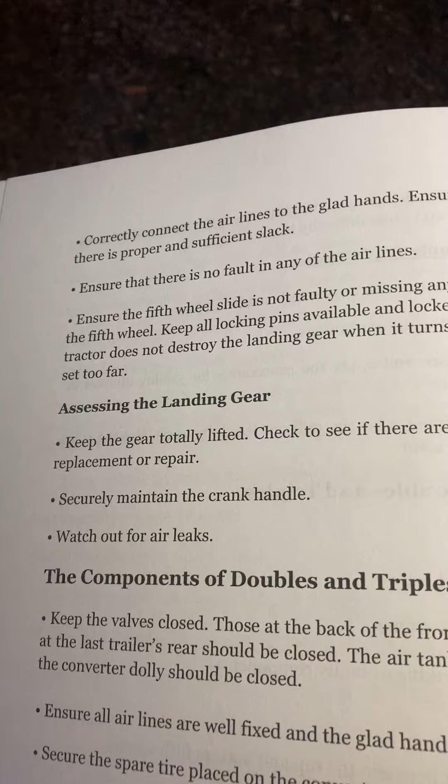CDL exam prep 2022 through 2023, page 46.

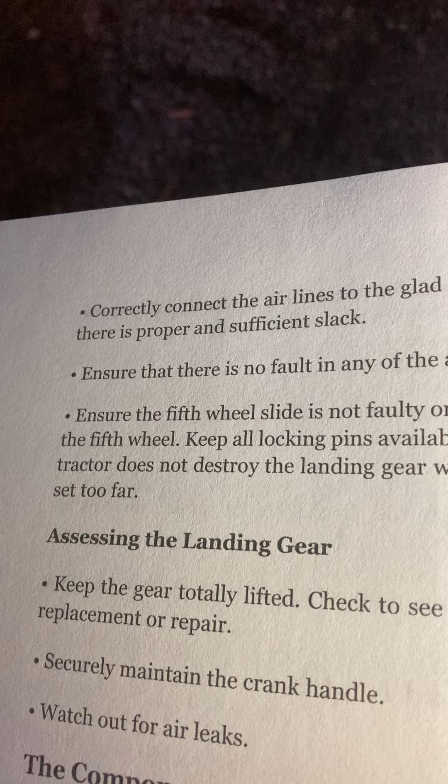Correctly connect the airlines to the glad hands. Ensure there are no air leaks and that there is proper and sufficient slack. Ensure that there is no fault in any of the airlines.

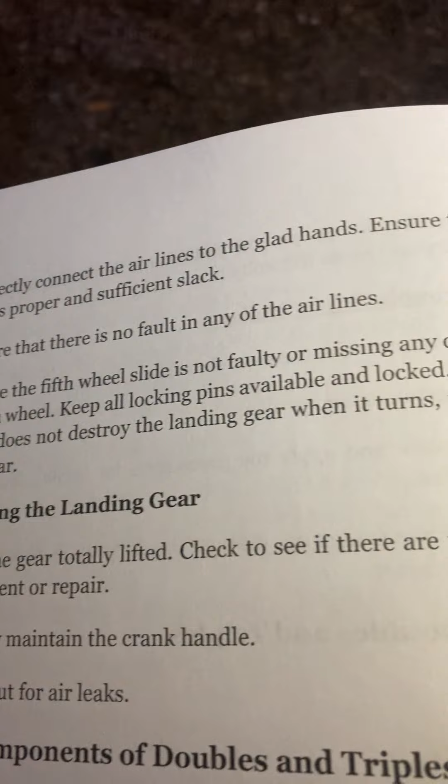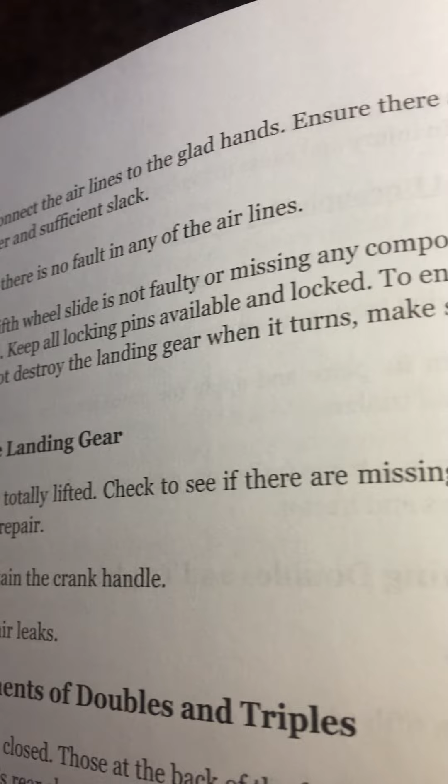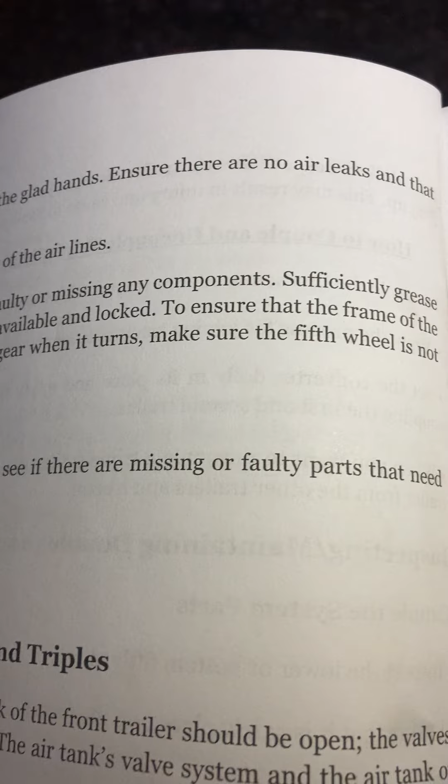Ensure the fifth wheel slide is not faulty or missing any components. Sufficiently grease the fifth wheel. Keep all locking pins available and locked, to ensure that the frame of the tractor does not destroy the landing gear when it turns. Make sure the fifth wheel is not set too far.

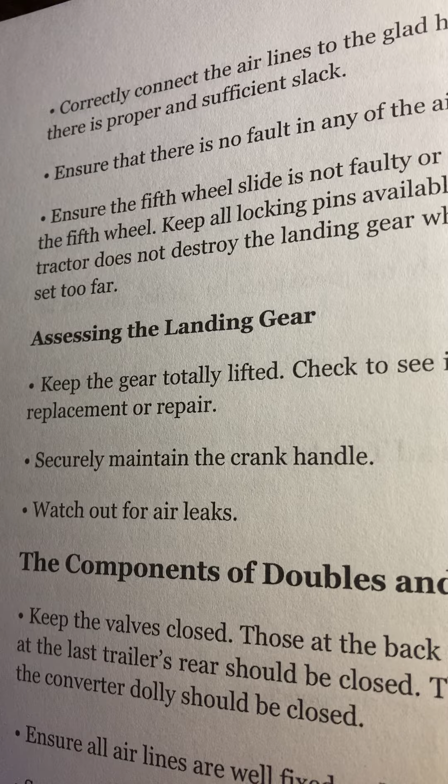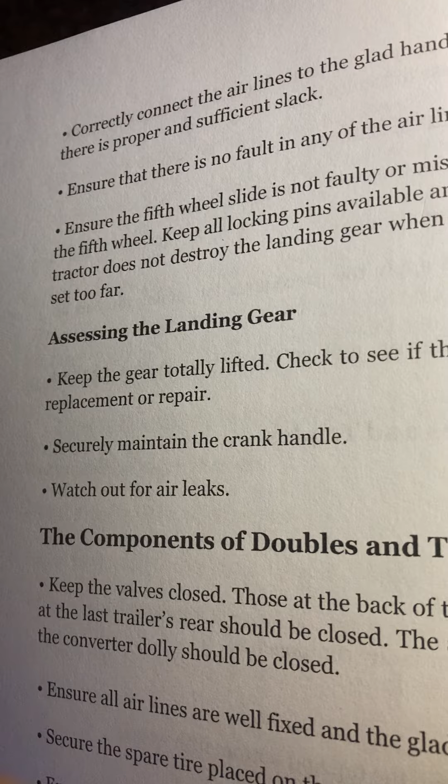Assessing the landing gear, keep the gear totally lifted. Check to see if there are missing or faulty parts that need replacement or repair. Securely maintain the crank handle. Watch out for air leaks.

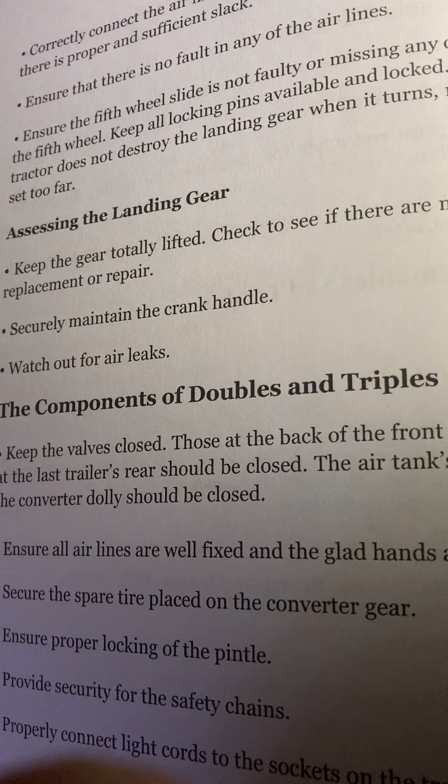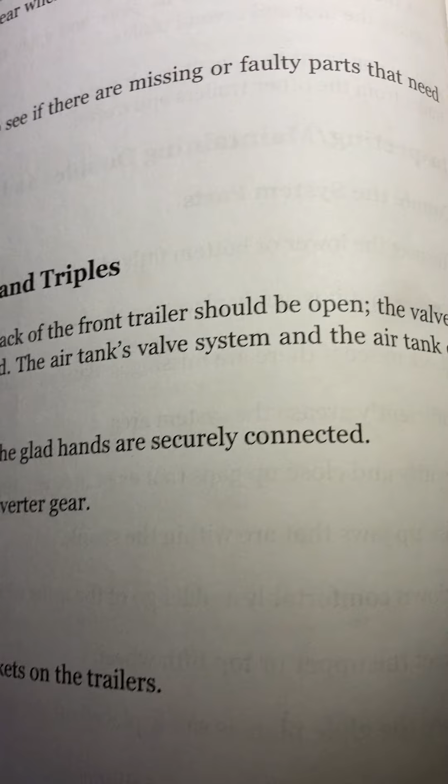The components of doubles and triples. Keep the valves closed. Those at the back of the front trailer should be open. The valves at the last trailer's rear should be closed. The air tank's valve system and the air tank of the converter dolly should be closed.

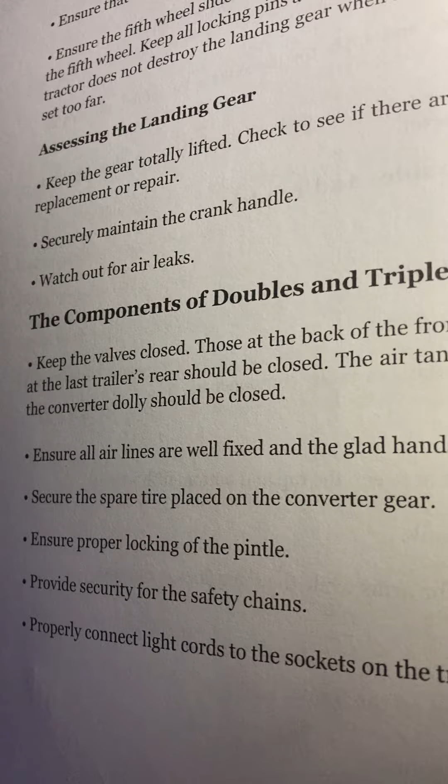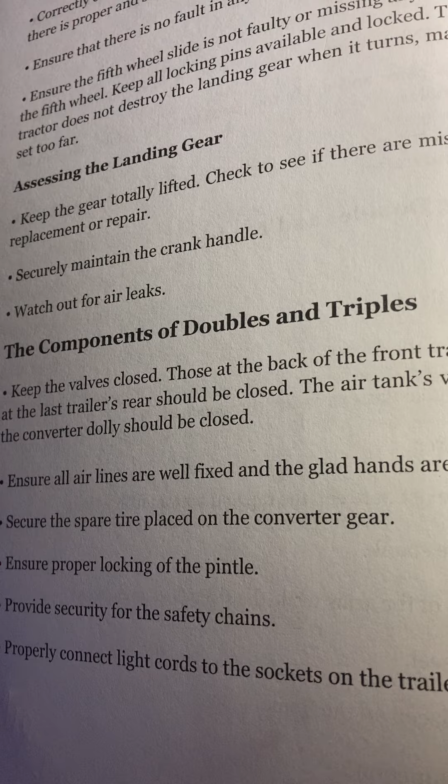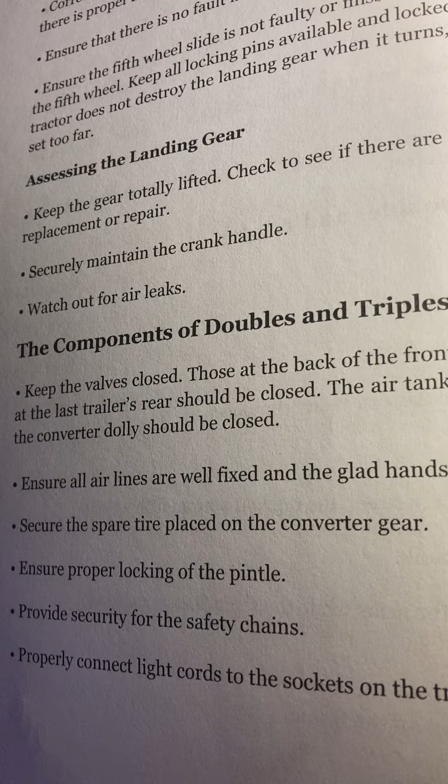Ensure all air lines are well fixed and the glad hands are securely connected. Secure the spare tire placed on the converter gear. Ensure proper locking of the pintle. Provide security for the safety chains. Properly connect light cords to the sockets on the trailers.

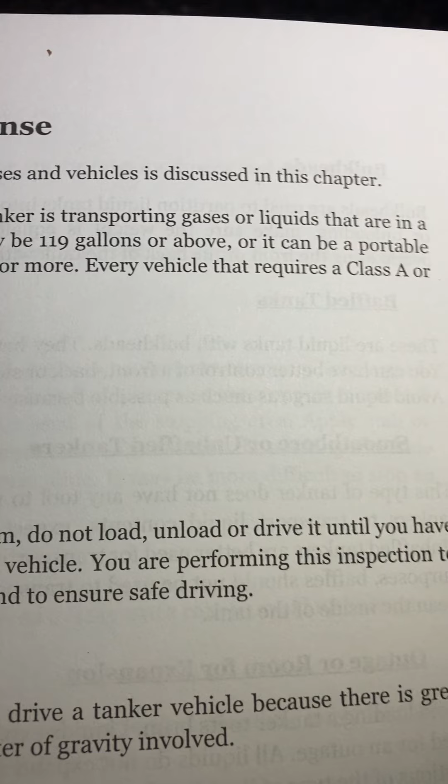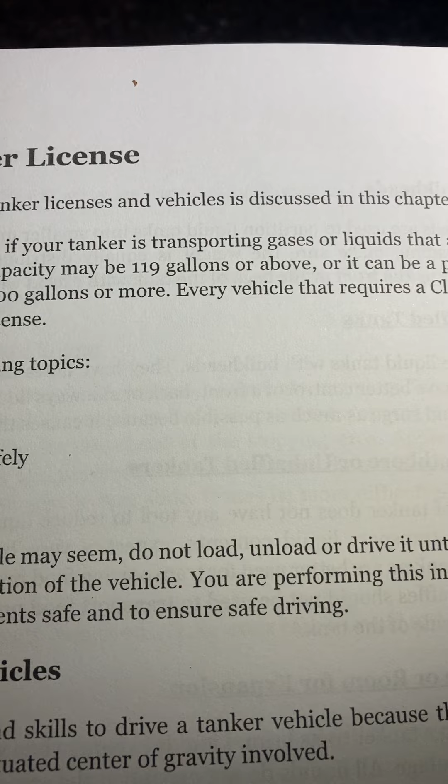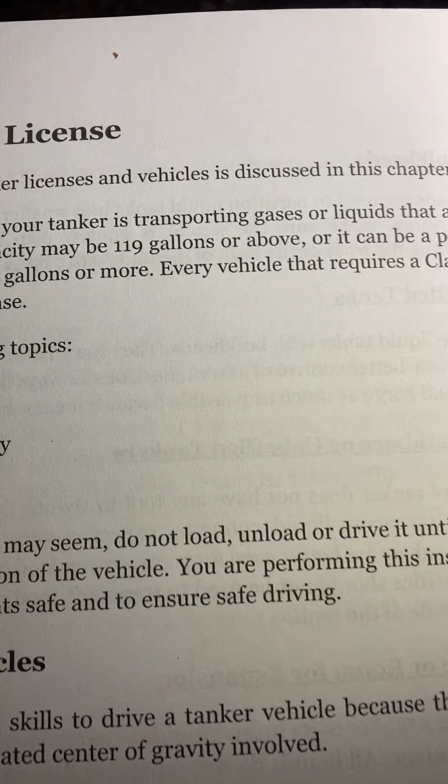Tanker license. All you need to know about tanker licenses and vehicles is discussed in this chapter. You will need a tanker license if your tanker is transporting gases or liquids that are in fixed cargo. The cargo tank capacity may be 119 gallons or above, or it can be a portable tank that has a capacity of 1,000 gallons or more. Every vehicle that requires a Class A or Class B CDL needs a tanker license.

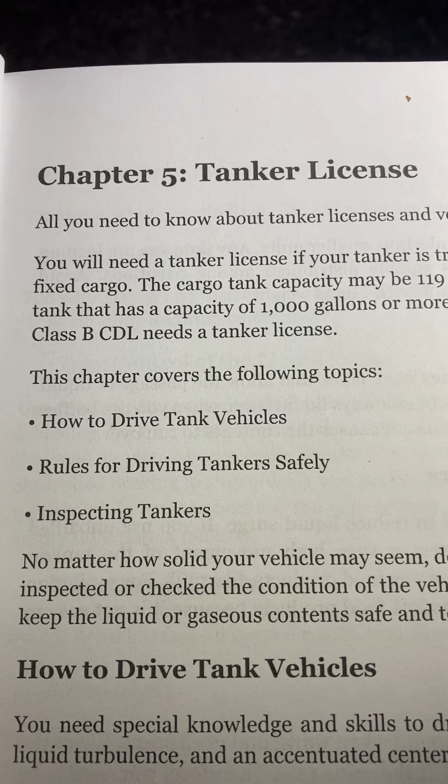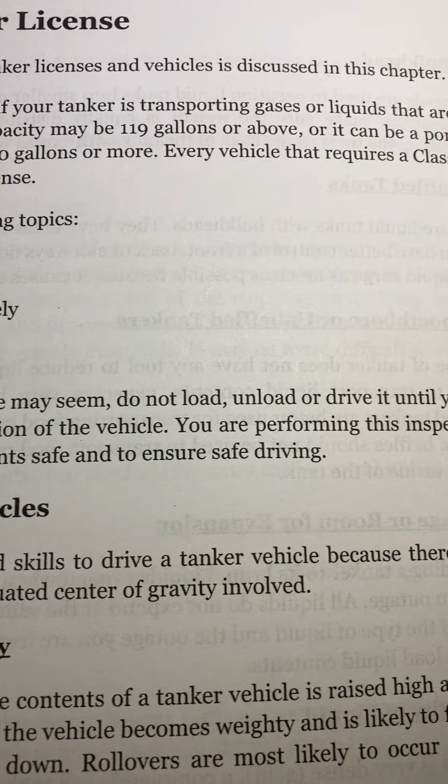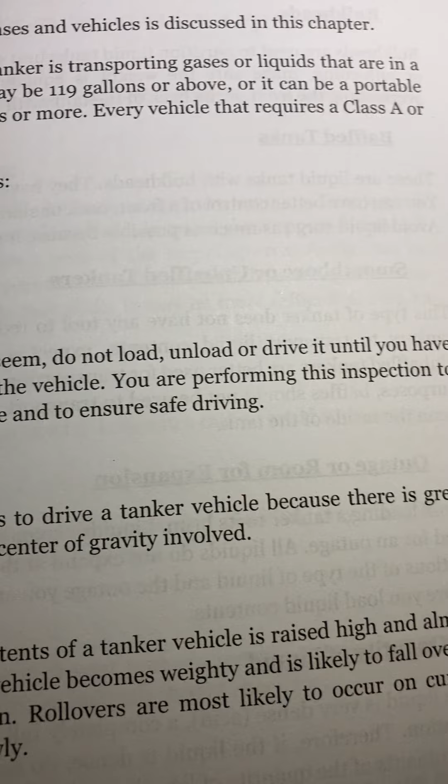This chapter covers the following topics: how to drive tank vehicles, rules for driving tankers safely, and inspecting tankers. No matter how solid your vehicle may seem, do not load, unload, or drive it until you have inspected or checked the condition of the vehicle. You are performing this inspection to keep the liquid or gaseous contents safe and to ensure safe driving.

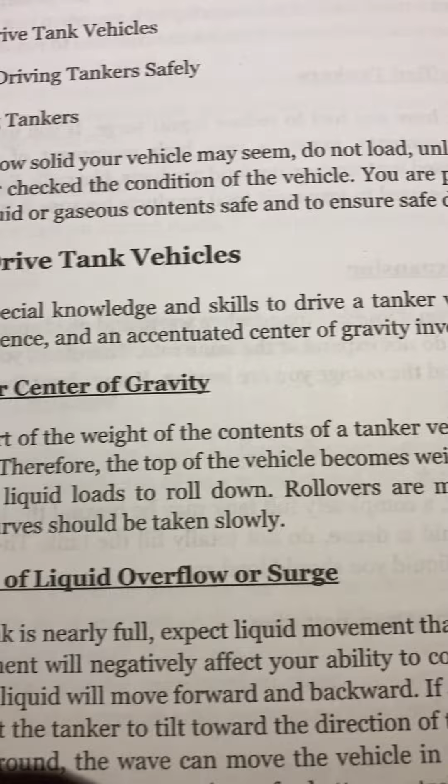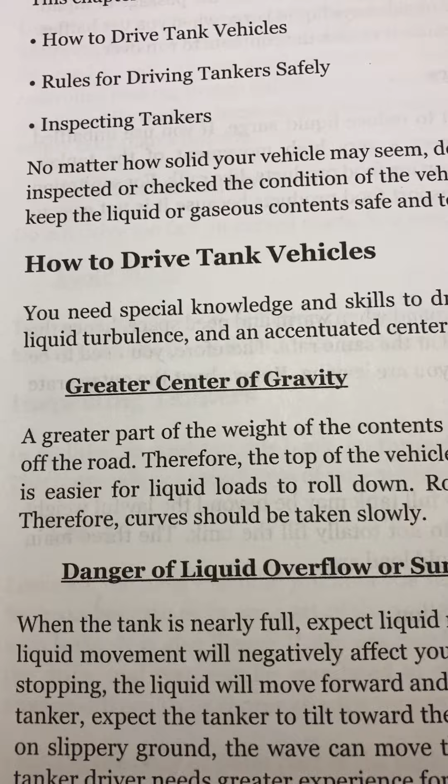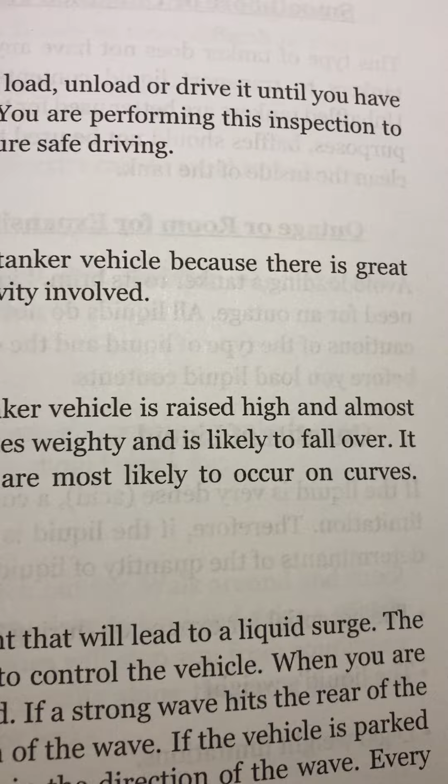How to drive tank vehicles. You need special knowledge and skills to drive a tanker vehicle because there is great liquid turbulence and an accentuated center of gravity involved. A greater part of the weight of the contents of a tanker vehicle is raised high and almost off the road. Therefore, the top of the vehicle becomes weighty and is likely to fall over.

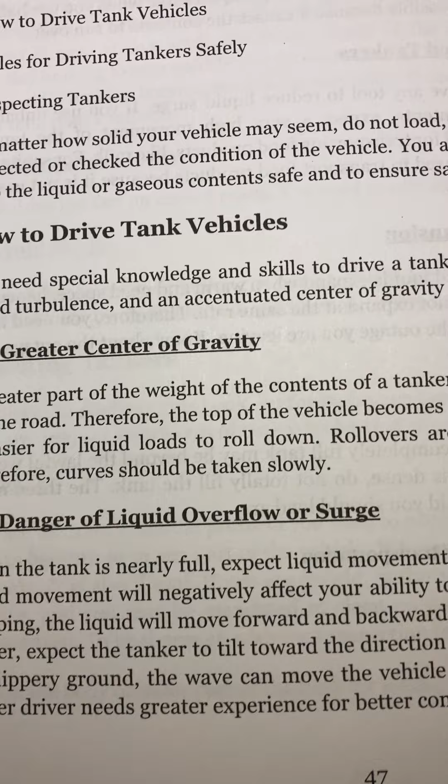It is easier for liquid loads to roll down. Rollovers are most likely to occur on curves. Therefore, curves should be taken slowly.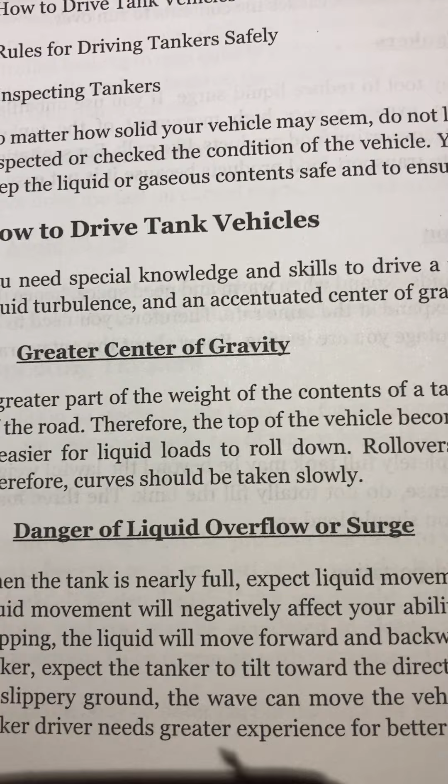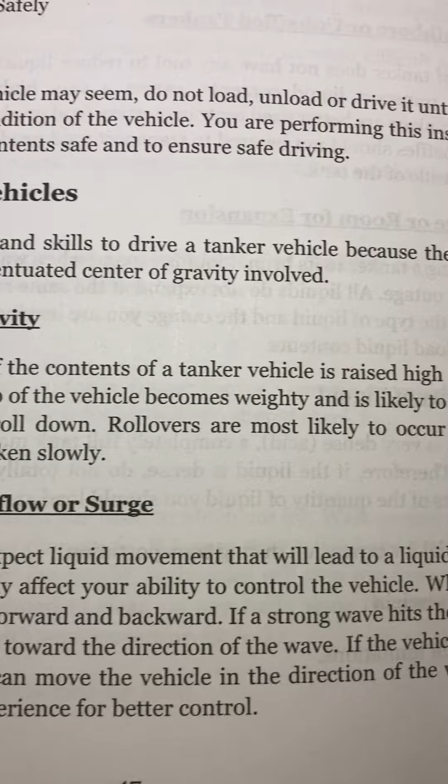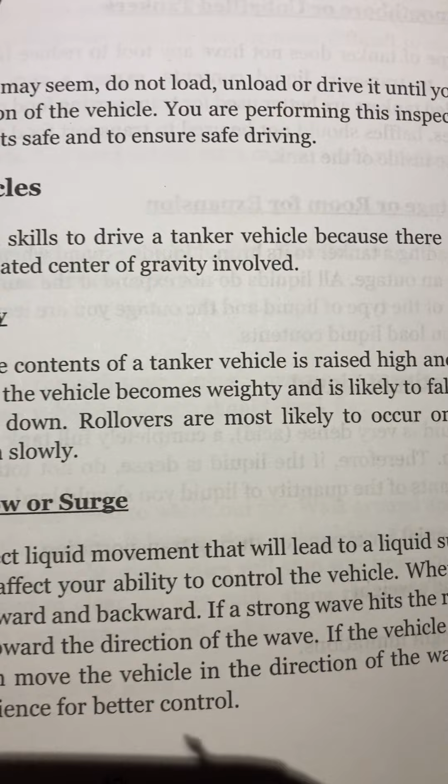Danger of liquid overflow or surge. When the tank is nearly full, expect liquid movement that will lead to a liquid surge. The liquid movement will negatively affect your ability to control the vehicle. When you are stopping, the liquid will move forward and backward. If a strong wave hits the rear of the tanker, expect the tanker to tilt toward the direction of the wave. If the vehicle is parked on slippery ground, the wave can move the vehicle in the direction of the wave. Every tanker driver needs greater experience for better control.

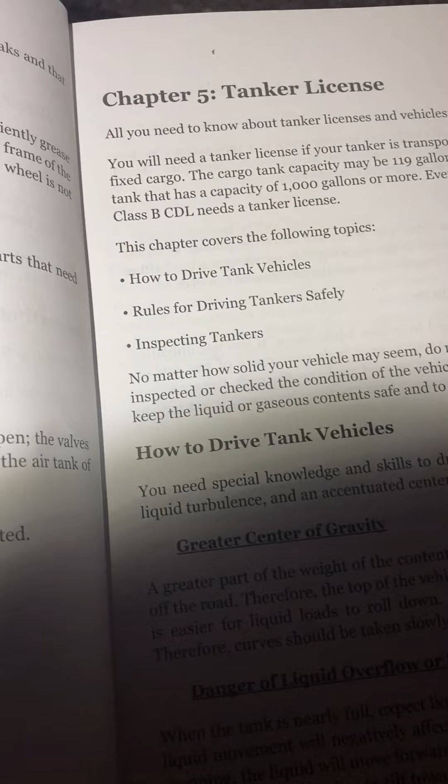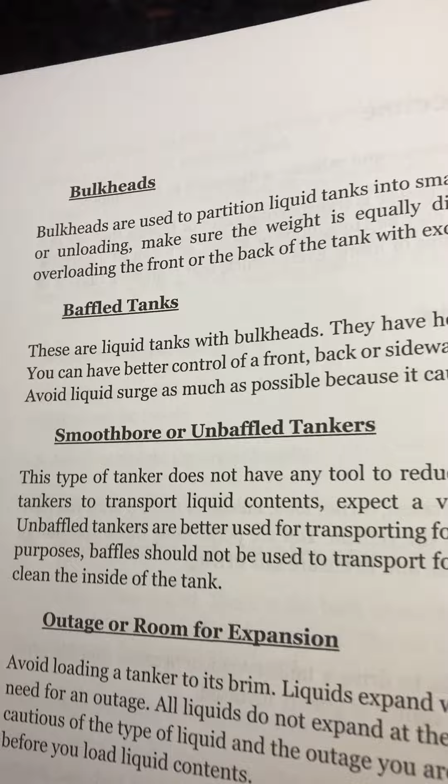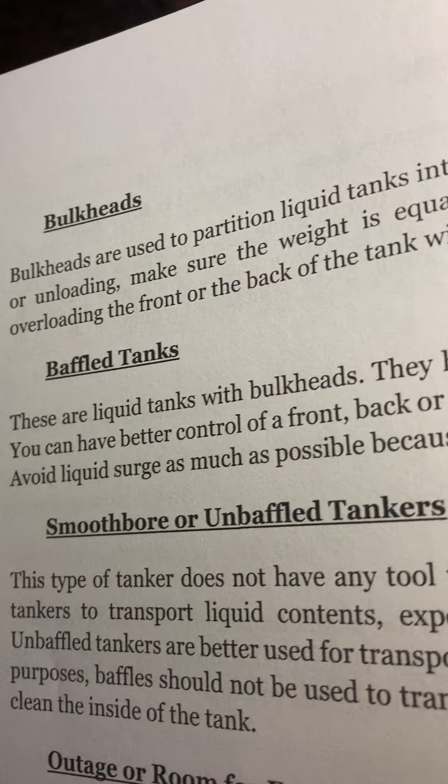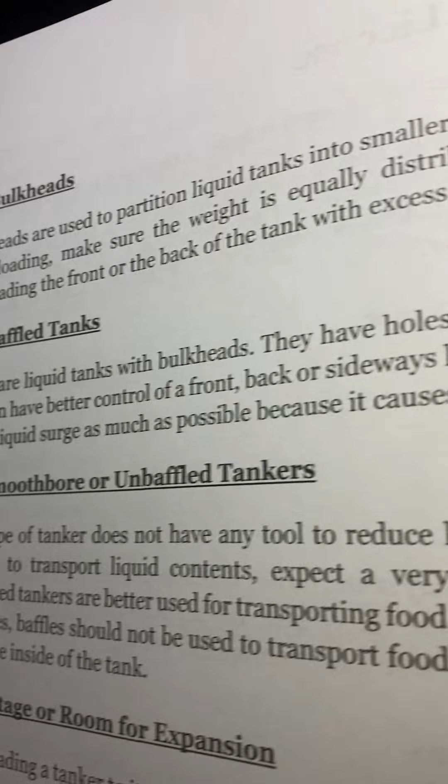Page 48. Bulkheads are used to partition liquid tanks into smaller units. Anytime you are loading or unloading, make sure the weight is equally distributed among partitions. Avoid overloading the front or the back of the tank with excess weight.

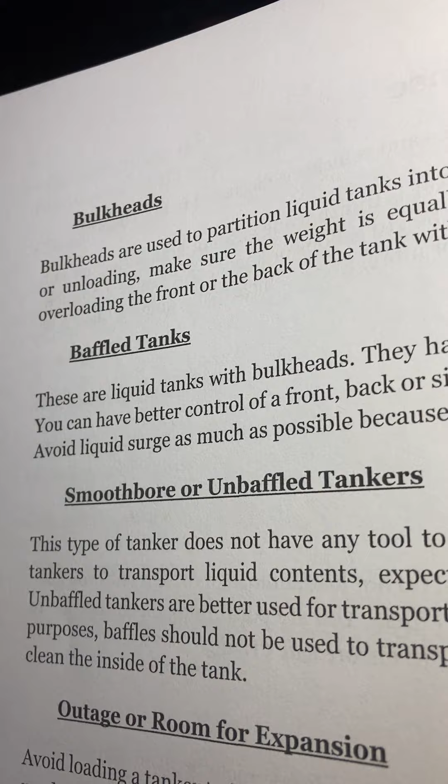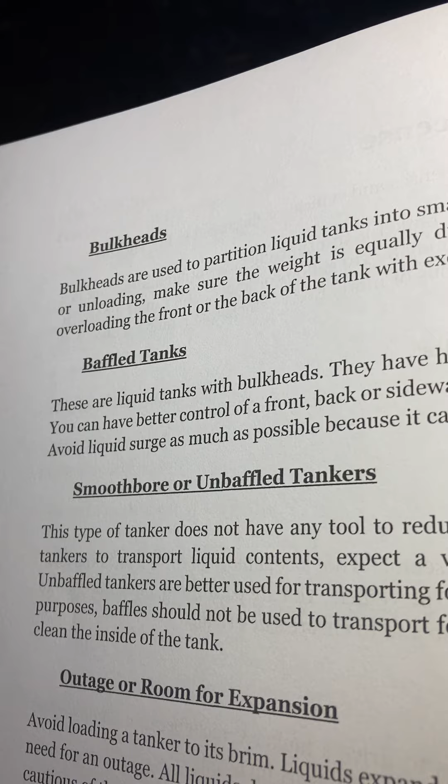Baffled tanks. These are liquid tanks with bulkheads. They have holes that allow the passage of liquid. You can have better control of a front, back, or sideways liquid surge when you use baffles. Avoid liquid surge as much as possible because it causes the contents to run over.

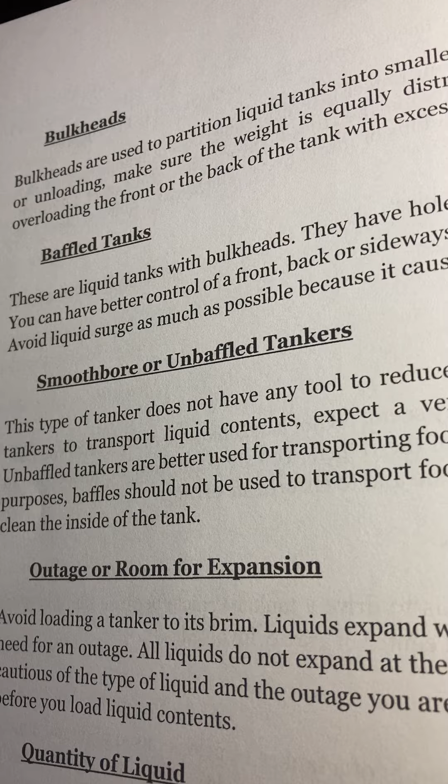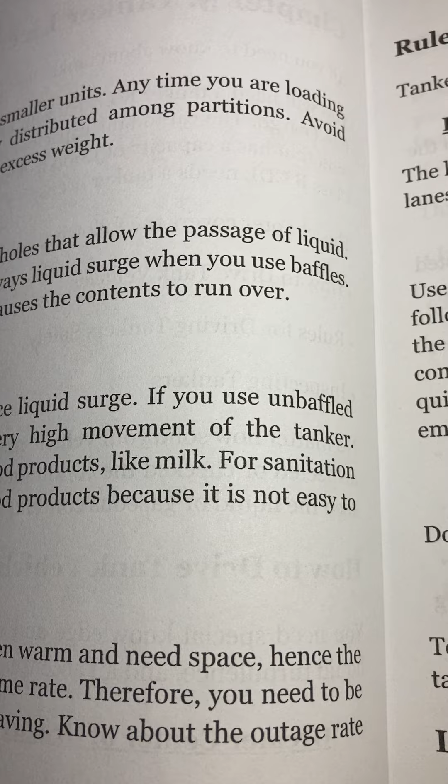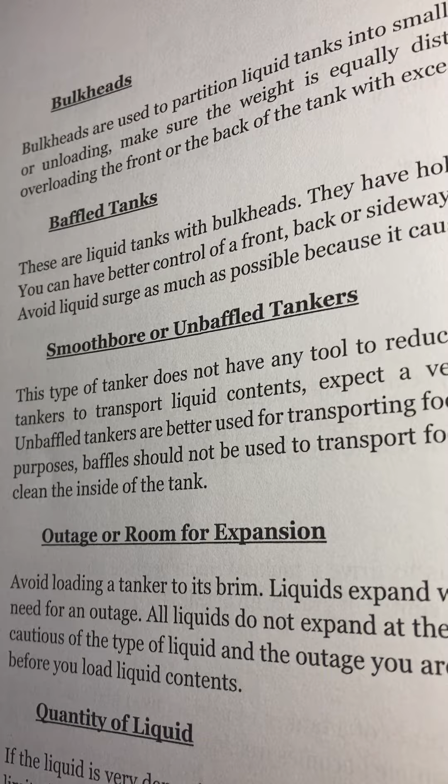Smoothbore or unbaffled tankers. This type of tanker does not have any tool to reduce liquid surge. If you use unbaffled tankers to transport liquid contents, expect a very high movement of the tanker. Unbaffled tankers are better used for transporting food products like milk for sanitation purposes. Baffled tanks should not be used to transport food products because it is not easy to clean the inside of the tank.

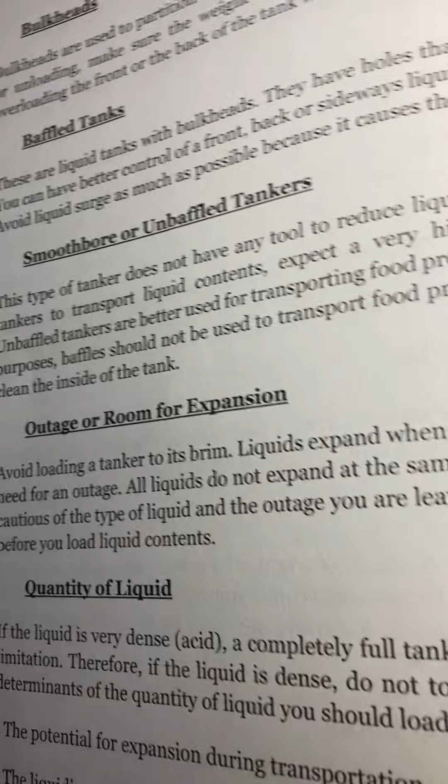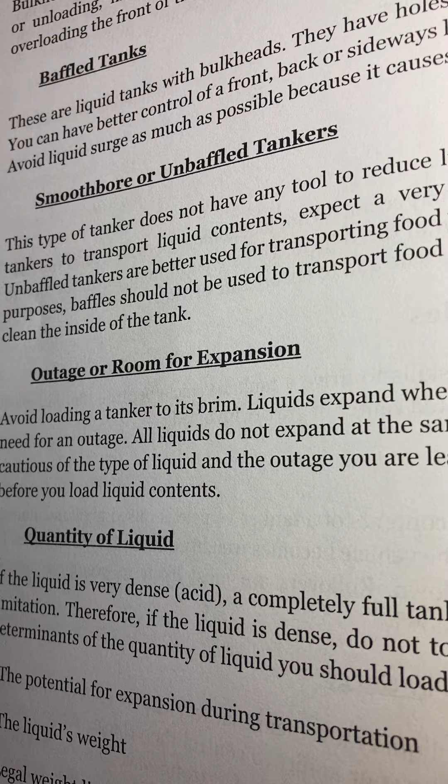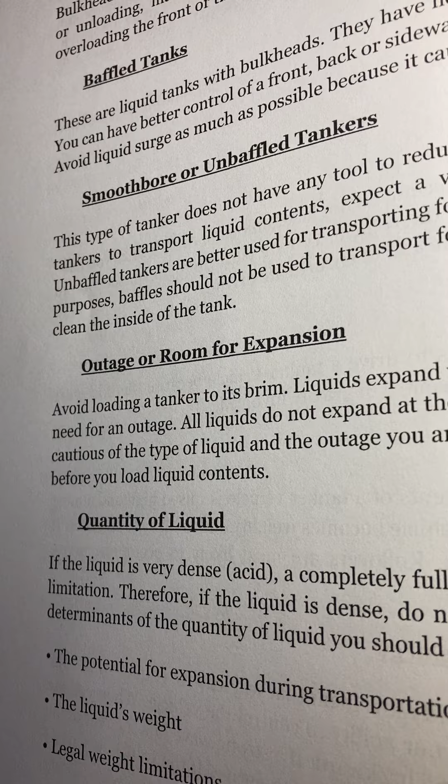Outage, or room for expansion. Avoid loading a tanker to its brim. Liquids expand when warm and need space, hence the need for an outage. All liquids do not expand at the same rate. Therefore, you need to be cautious of the type of liquid and the outage you are leaving. Know about the outage rate before you load liquid contents.

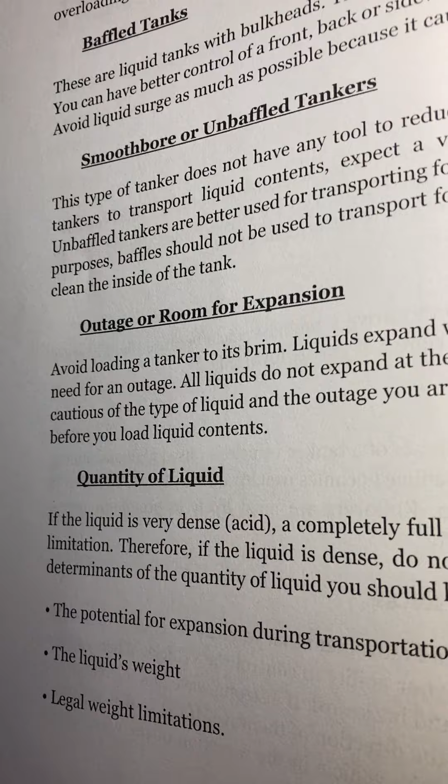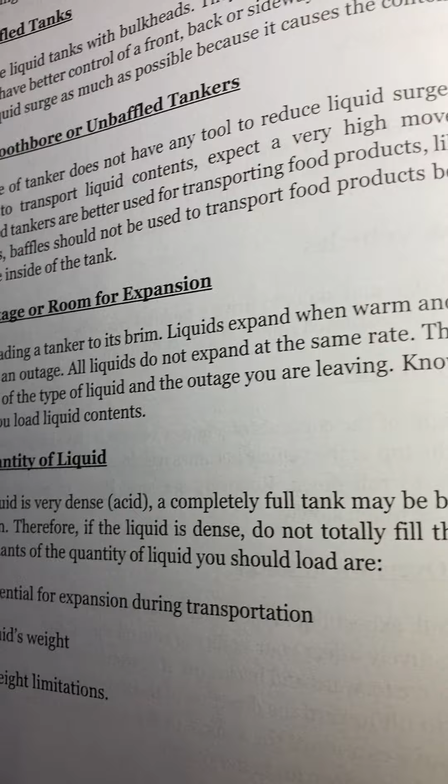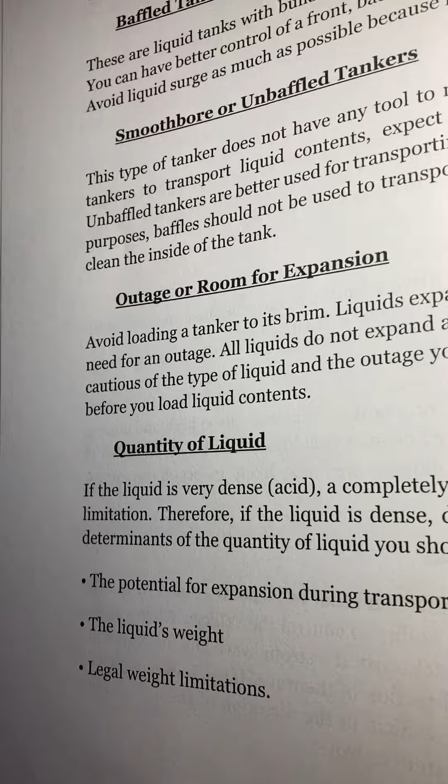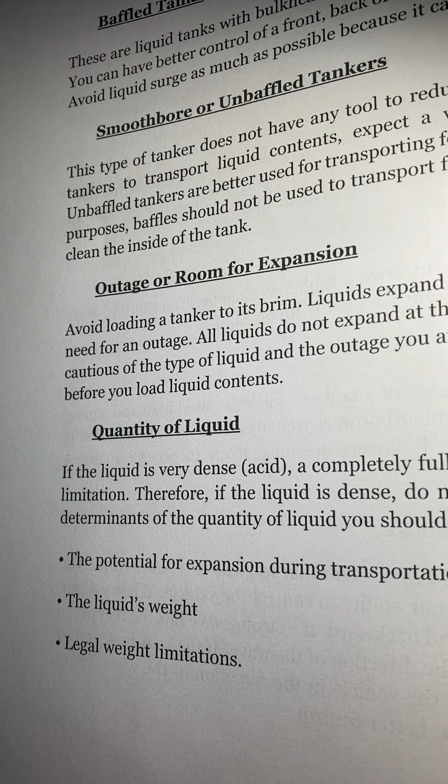Quantity of liquid. If the liquid is very dense, a completely full tank may be beyond the lawful weight limitation. Therefore, if the liquid is dense, do not totally fill the tank. The three main determinants of the quantity of liquid you should load are: number one, the potential for expansion during transportation; number two, the liquid's weight; and number three, legal weight limitations.

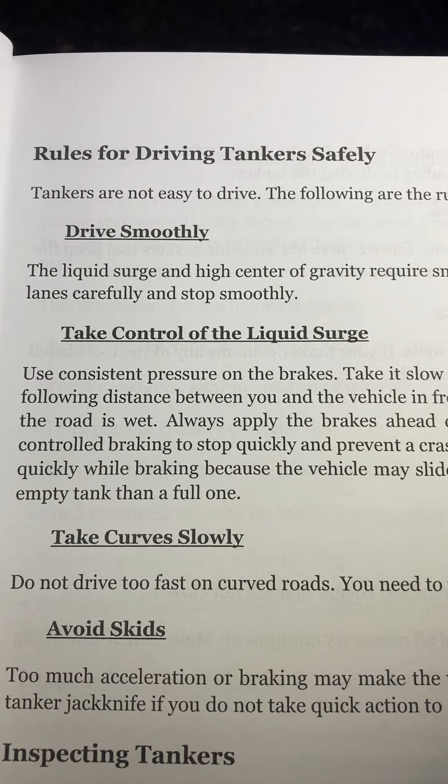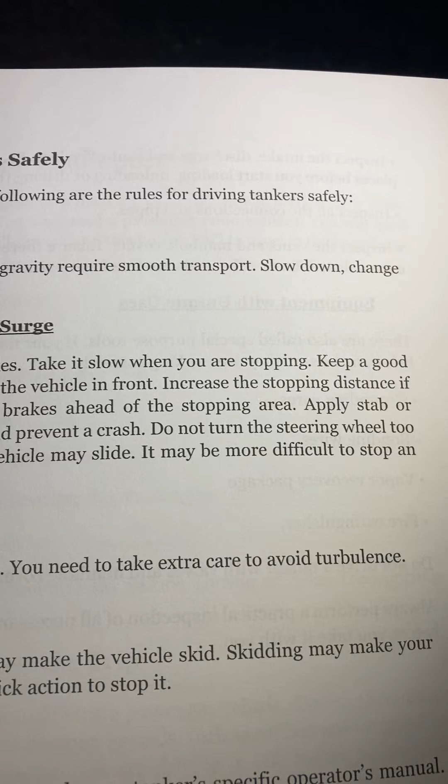Page 49. Rules for driving tankers safely. Tankers are not easy to drive. The following are the rules for driving tankers safely. Drive smoothly. The liquid surge and high center of gravity require smooth transport. Slow down, change lanes carefully, and stop smoothly.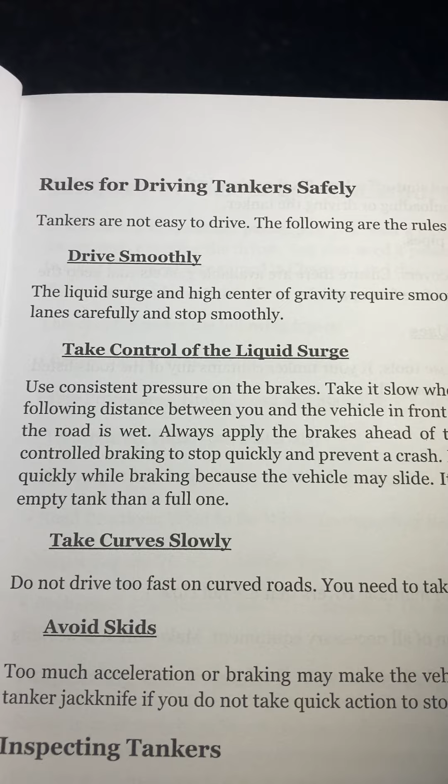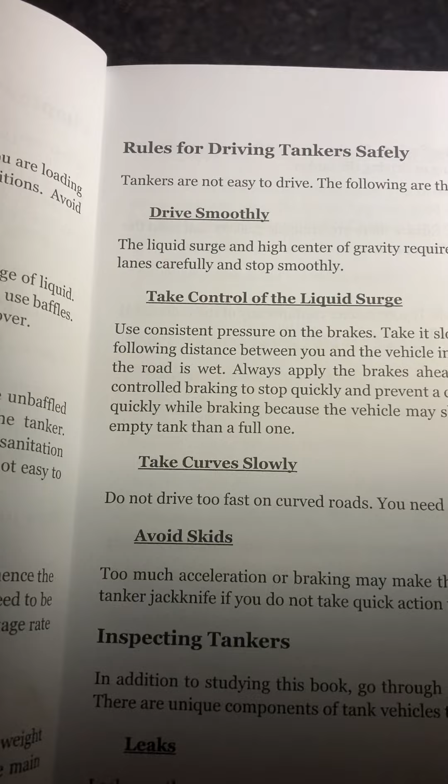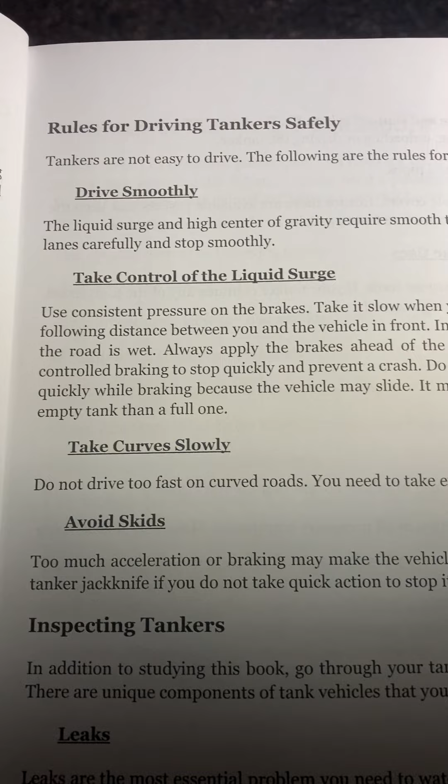Take control of the liquid surge. Use consistent pressure on the brakes. Take it slow when you are stopping. Keep a good following distance between you and the vehicle in front. Increase the stopping distance if the road is wet. Always apply the brakes ahead of the stopping area.

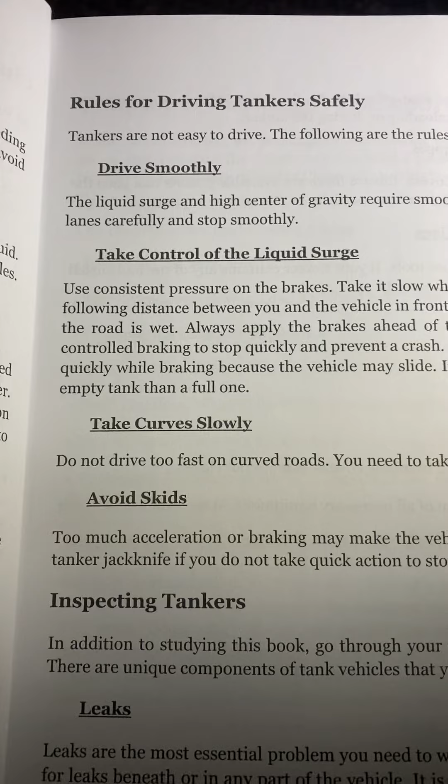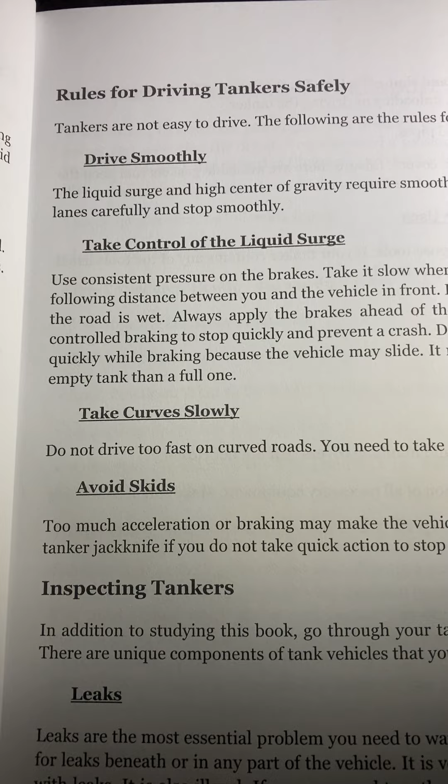Apply stab or controlled braking to stop quickly and prevent a crash. Do not turn the steering wheel too quickly while braking because the vehicle may slide. It may be more difficult to stop an empty tank than a full one.

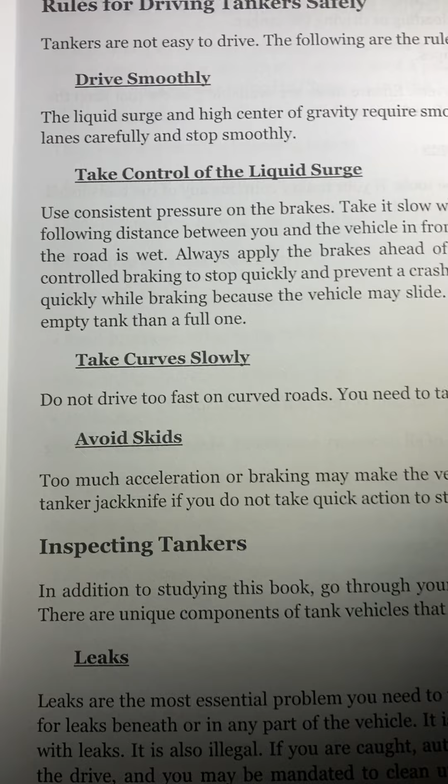Take curves slowly. Do not drive too fast on curved roads. You need to take extra care to avoid turbulence. Avoid skids. Too much acceleration or braking may make the vehicle skid. Skidding may make your tanker jackknife if you do not take quick action to stop it.

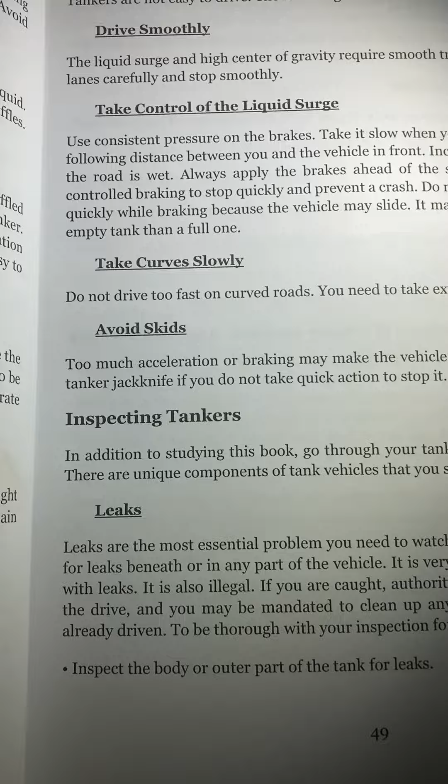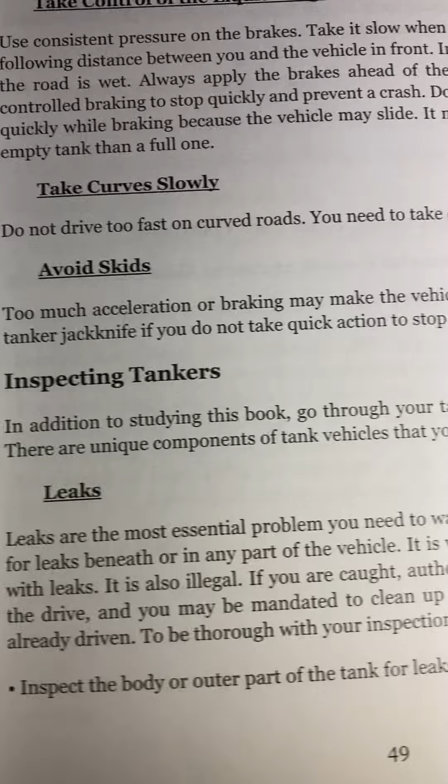Inspecting tankers. In addition to studying this book, go through your tanker's specific operator's manual. There are unique components of tank vehicles that you should check for.

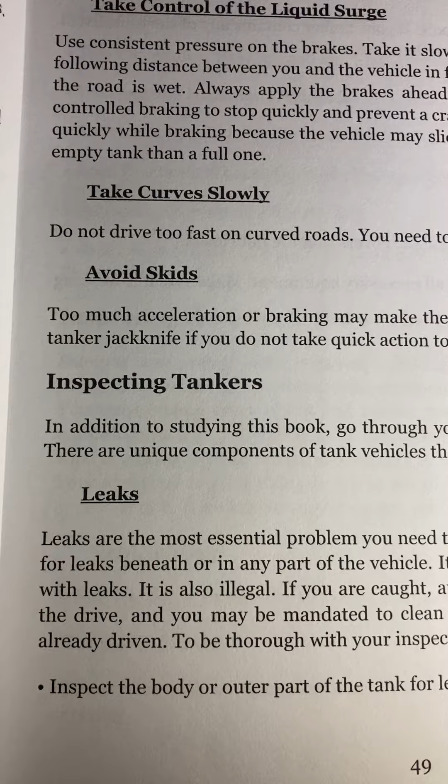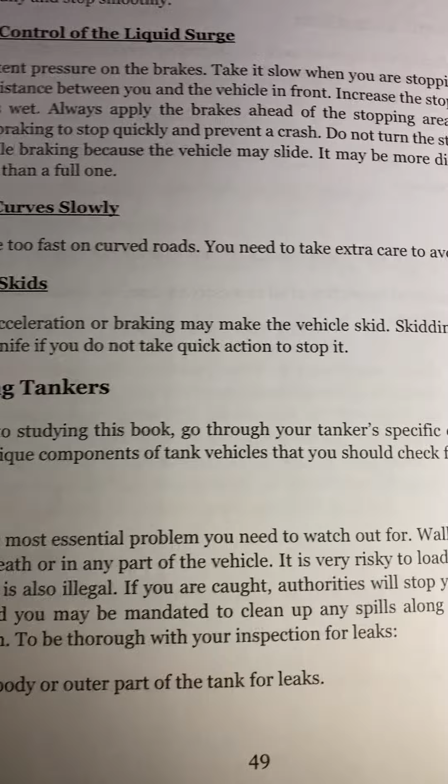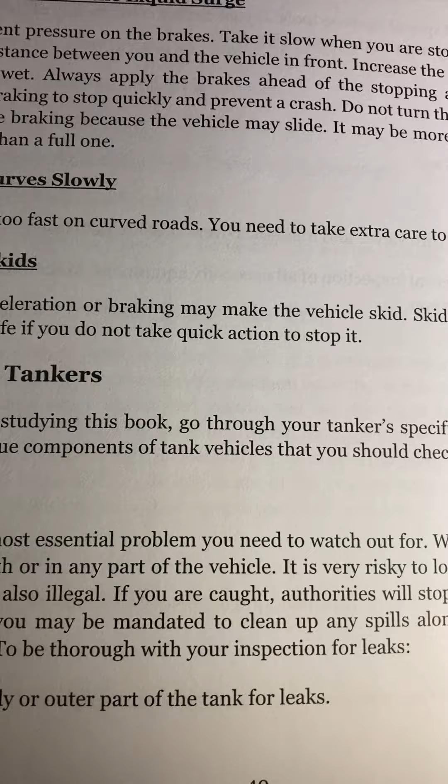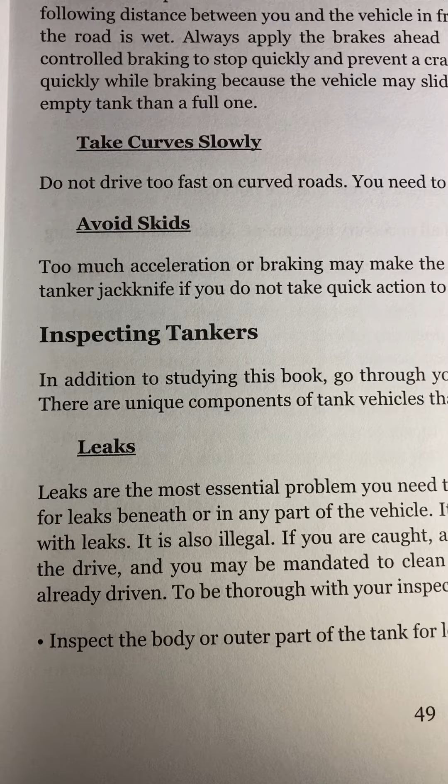Leaks are the most essential problem you need to watch out for. Walk around and check for leaks beneath or in any part of the vehicle. It is very risky to load and drive a vehicle with leaks. It is also illegal. If you are caught, authorities will stop you from continuing the drive, and you may be mandated to clean up any spills along the route you have already driven. To be thorough with your inspection for leaks, inspect the body or outer part of the tank for leaks.